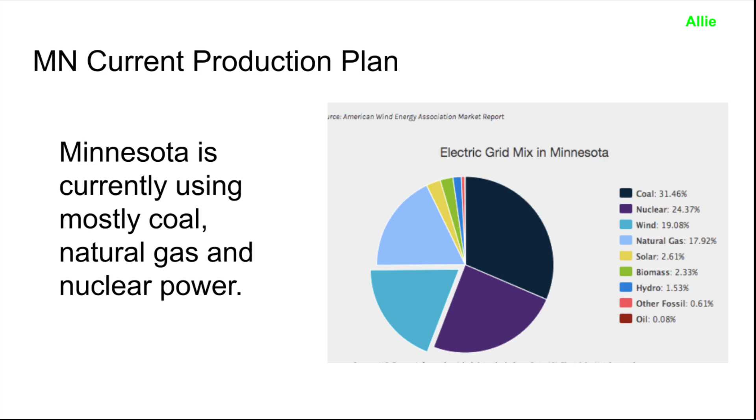Minnesota is currently using mostly coal, natural gas, and nuclear energy resources to create power. Our production plan would be that Minnesota's baseload is currently being fulfilled mainly through coal and nuclear power plants.

The 4,000 watts produced by coal would be completely replaced by nuclear power, with 4 new 1 gigawatt nuclear power plants being built. The 5,800 peak load power created by natural gas would be replaced through existing hydroelectric and the construction of around 3,000 new 2 megawatt wind turbines.

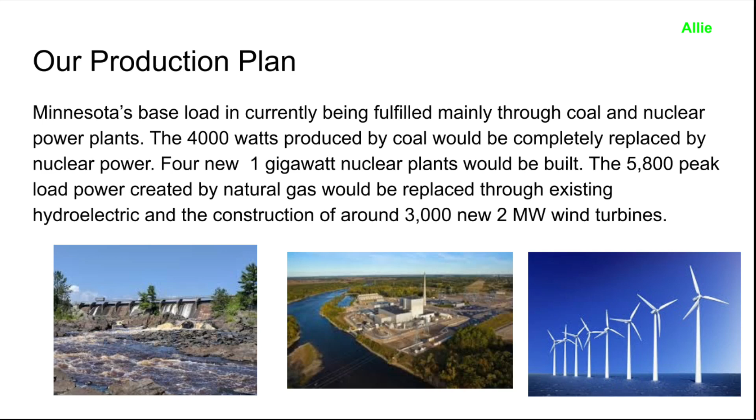Minnesota currently satisfies around 25% of its power through 2 nuclear plants. 4 new 1 gigawatt plants would need to be created in order to completely replace coal. These plants would be located on major waterways such as the Minnesota or Mississippi River.

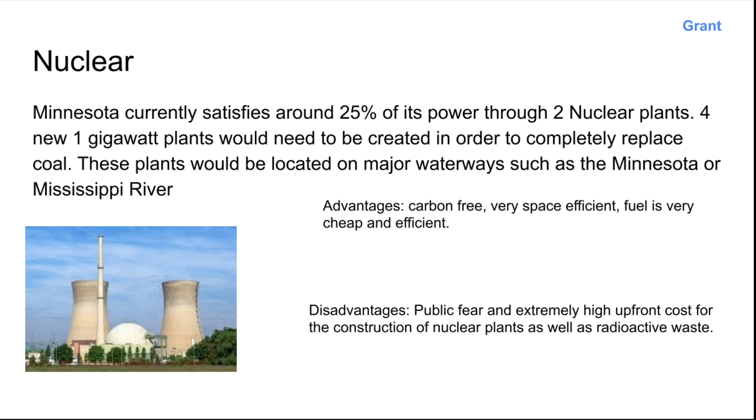Advantages are that nuclear power is carbon-free, very space efficient, and fuel is very cheap and efficient. While the disadvantages are public fear and extremely high upfront costs for the construction of nuclear plants, as well as radioactive waste, of course. Nuclear generation is able to be improved through the implementation of breeder reactors.

These reactors produce more fissionable material than they consume. They essentially allow us to get more fuel as output than input. The reason why these reactors are not currently used is that they produce plutonium-239, or Pu-239, which is weapons grade and could be used to produce a nuclear fission bomb. The U.S. breeder reactor program was shut down due to these exact fears.

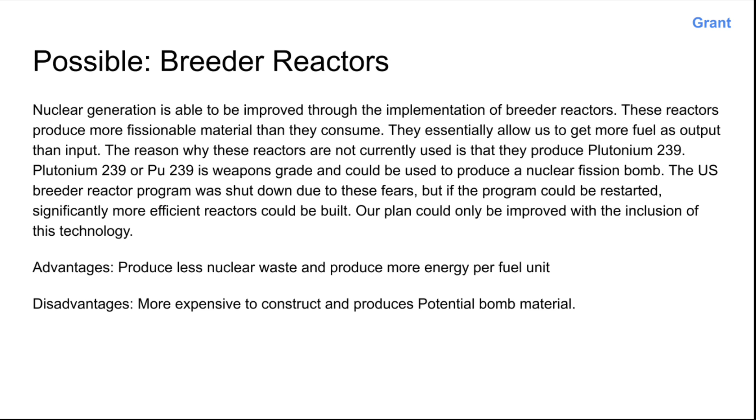But if the program could be restarted, significantly more efficient reactors could be built. Our plan could only be improved with the inclusion of this technology. The advantages are that they produce less nuclear waste and produce more energy per fuel unit, while they are more expensive to construct and produce potential bomb material.

For wind power, we will need 3,000 more wind turbines, and those will go in northern Minnesota. We need these to produce 5,800 more megawatts, and industrial grade wind turbines make about 2 megawatts each. They also take up about 1.5 acres each, so we will need 4,500 more acres of land for all the wind turbines.

Positives of wind power is that it is cheap compared to other renewable energy sources. It's clean and carbon-free. The wind turbines are scalable and easy to build and efficient. Some negatives could be that they take up a lot of space, there's noise pollution, and they need lots of maintenance.

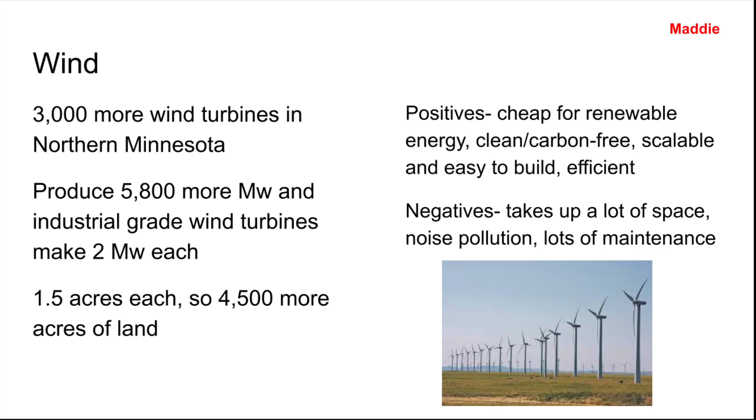Another technology in our plan is hydroelectricity. Out of all the other technologies, it is least utilized. Even though this is part of our plan, we will not be adding any additional facilities or power produced since it's not necessary. We believe that the 11 facilities that are built and the 120 megawatts of power that is produced in Minnesota will be enough for our plan.

Some pros is that it doesn't create any air pollution or greenhouse gases, and some cons is that it may cause flooding and destroy ecosystems. Again, since we aren't adding any more facilities, there will be no additional cost to the plan.

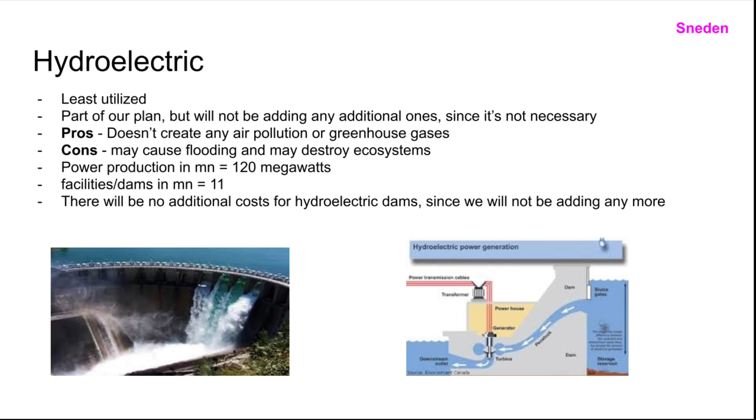For cost of our project, wind power would cost roughly $3.5 million per turbine, and with 3,000 more turbines being built, it would cost $10.5 billion just for wind power. For hydroelectric, it will be no additional cost since we won't be building any more facilities. We'll just be using the 11 hydroelectric facilities we already have.

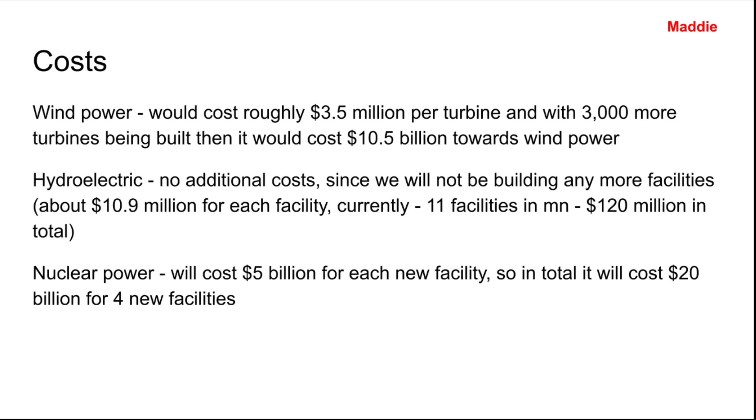For nuclear power, it will cost $5 billion for each new facility. So in total, it will cost $20 billion for the 4 nuclear power facilities we will be building.

Our plan is good because it is simple. It focuses on a few proven energy solutions and uses them widely. Solutions like solar are too variable in their production, and batteries are not reliable enough to store the needed amount of energy, while wind and nuclear have worked and still work very well.

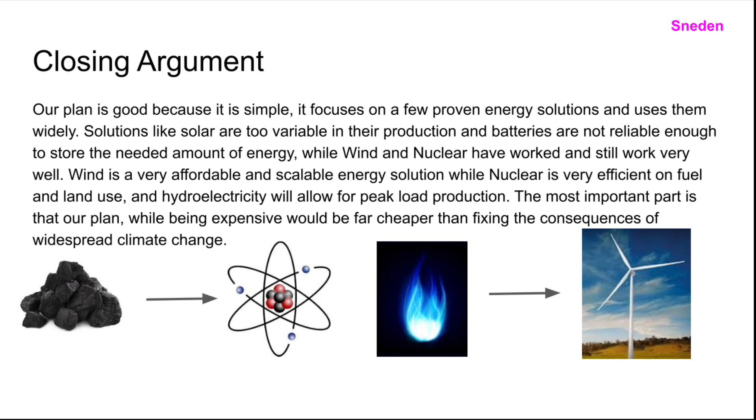Wind is a very affordable and scalable energy solution, while nuclear is very efficient on fuel and land use, and hydroelectricity will allow for peak load production. The most important part is that our plan, while being expensive, would be far cheaper than fixing the consequences of widespread climate change.